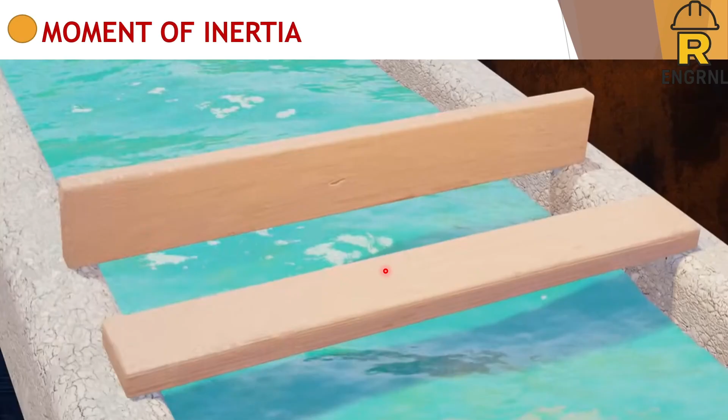Ano nga ba yung moment of inertia? Let's start with this illustration. Meron tayong dalawang same cross-section na planks, pero iniga natin siya ng magkaibang orientation. Yung isa nakatayo, yung isa nakahiga. Kung maglalagay ako ng load dito, like 100 kg, palagay nyo alin sa dalawa ang mag-bend ng malala? Palagay ko ang sagot nyo ay yung nakahiga. Tama yon.

Because yung cross-section ng dalawa ay parehas, though magkaiba sila ng orientation, depende sa rotational axis natin. Yung bending axis natin, or rotational axis, is placed here. May mas appreciated cross-sectional area dito sa part na nakatayo, kaya mas nakakapag-resist siya ng bending, unlike dito. Ibig sabihin, this moment of inertia is like an area rotating at a certain axis, dahil may moment. Ibig sabihin, may certain area o certain force with a moment arm perpendicular to it na magmo-moment at a certain point. Ang tawag natin dito ay second moment of area. This is the measure of a cross-section's resistance to bending due to its shape.

Pwedeng magkakaiba yung orientation ng bending axis nila. Pwede sa y-axis, pwede horizontal axis, or pwedeng wala din sa centroids nila. Basta alam lang natin kung ano yung kanyang moment arm. Ito yung resistance to bending.

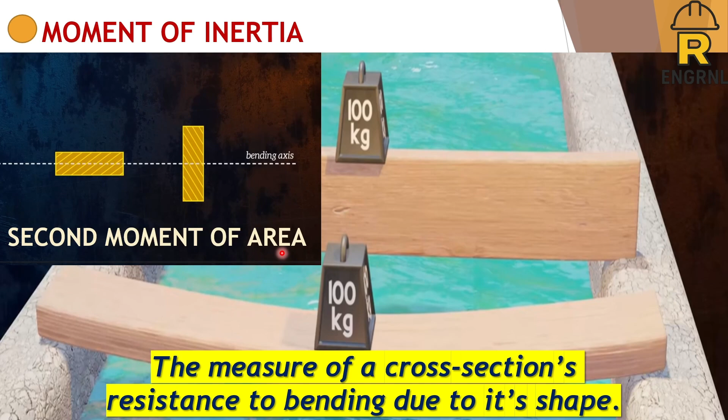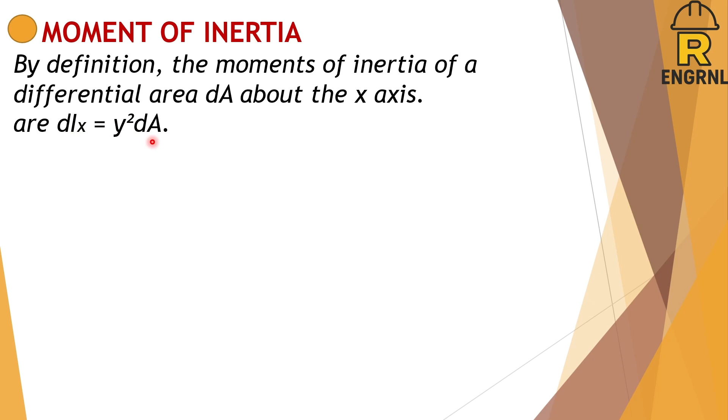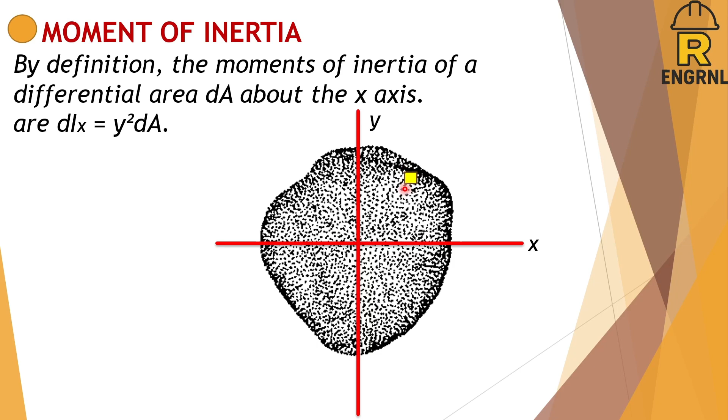By definition, the moment of inertia of a differential area or dA about the x-axis, the differential element of Ix is equal to y squared dA. Para mas magets natin, meron tayong arbitrary shape, at a centroidal axis, tututok ito sa centroid niya. At from that arbitrary shape, kukuha tayo ng isang element, ito yung infinitesimal element. Yung area, yung small area, tinatawag nating differential area, na kapag minultiply natin into distance y squared measured from the point of rotation, which is x-axis, ito yung second moment of area, which is also the sum - pag kinuha natin yung isang element at sinum-up para makuha yung buong shape - equal to I, ang inertia. Since sa x tayo nag-rotate, Ix yan.

Kung ito ay centroidal x-axis, ibig sabihin ito ay centroidal moment of inertia, ganon din sa y. Sa integral calculus, mas sanay tayong makita yan ng ganito: integral of y squared dA, limits from the whole area. Kung kukunin din natin sa y-axis mula sa element na ito, ito naman yung kanyang moment arm, so x squared naman yan times dA. Yan lang yung formula natin for moment of inertia of a certain shape. Yung units natin na ginagamit, pag SI, mm to the fourth o meters to the fourth, at sa English units ay inch to the fourth o feet to the fourth. Basta ang ating exponent ay at the fourth.

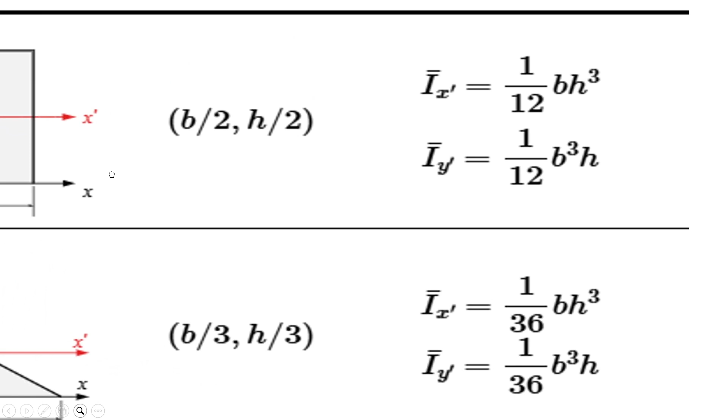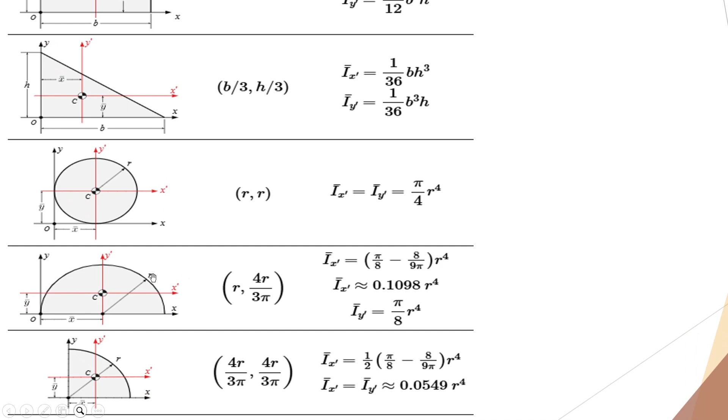Now, there are regular shapes na initially proven na yung kanyang centroidal moment of inertia, alam din natin yung kanyang centroid. So look at these figures - rectangular, meron tayong BH cube over 12, b cube of h over 12 sa Y, and so on and so forth. Ito yung mga familiar regular shapes na magiging reference natin sa mga susunod nating examples.

Para maintindihan nating mabuti yung process ng pagkuha ng moment of inertia at any axis, kailangan mo munang maintindihan na meron siyang sariling moment of inertia at its centroid. Kung mapapansin nyo yung red axis, yan yung centroidal axis, nakatutok sa center ng mga shapes. Yung Y and X axis naman ay yung global axis, ibig sabihin dyan siya ni-reference sa global. Kung kukuha tayo ng moment of inertia at global X axis and Y axis, may paraan pa tayo doon, pero for this time, tatandaan lang natin na meron siyang sariling moment of inertia at its centroid. Isa sa ulo natin to.

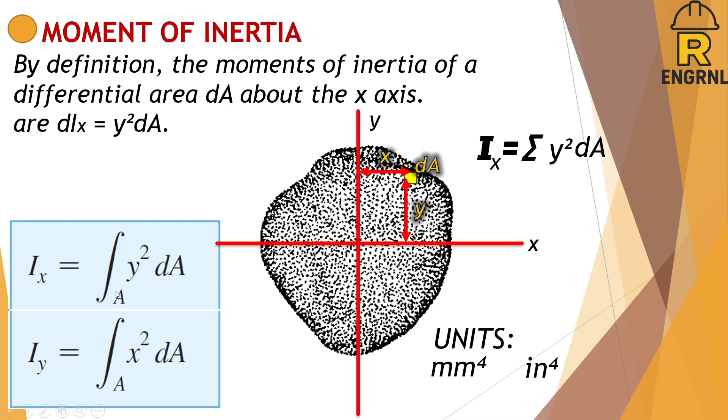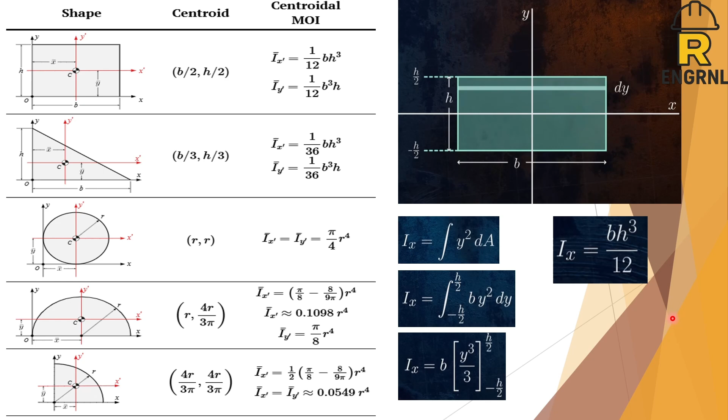Yun, ito yung centroidal moment of inertia about x-axis. So sa IY naman, papalitan mo lang yung infinitesimal element at y direction, instead of y gagawin mo lang x squared.

At by calculation, ganun din po, magiging b cube h lang over 12. So yan yung naging process nung ating centroidal moment of inertia. Ganun din yung gagawin mo sa triangle, circle, semicircle, and quarter circle.

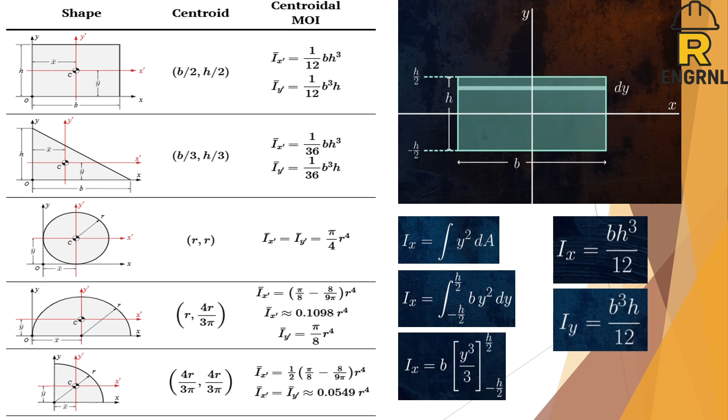Let's proceed with this: parallel axis theorem of an area. Sabi ko kanina, pwede rin naman na ang area ay mag-take ng moment of inertia at any axis.

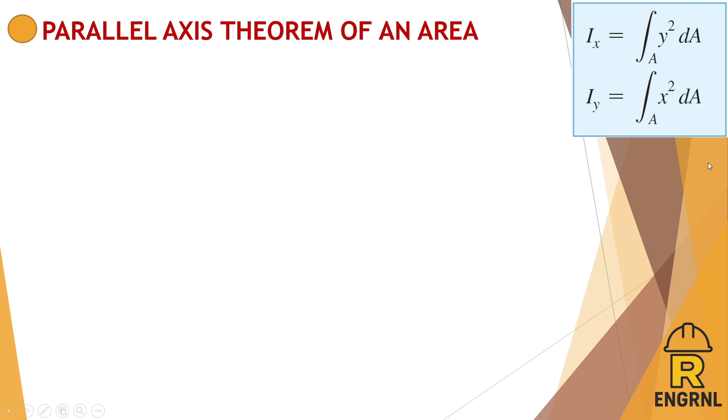Hindi lang sa centroidal axis. Kinuha lang natin kanina yung centroidal axis para centroidal moment of inertia sa x-axis, para pwede natin siyang i-transfer at any axis. So suppose you have an area here, at any place, no? Kung ito yung kanyang centroidal axis, ito yung centroid niya, papaikutin daw natin siya at any axis.

For example, ito na yung bagong x-axis mo, tapos dito yung bagong y-axis, ito yung y-axis mo. So sabi niya, the moment of inertia of an area about any axis that is parallel to an axis passing through the centroid and about which the moment of inertia is known. So dahil known na yung ating mga moment of inertia sa centroidal, paikutin lang natin siya at any axis.

Yung area na ito is ita-times natin sa moment arm. Suppose iikot ka sa x-axis, ang moment arm niya is d. Kukunin mo yung perpendicular distance niya doon sa point of rotation and then i-square mo, tapos i-add mo yon sa sarili niyang centroidal inertia.

Yun nga, Ix is equal to Ix prime bar, ang ibig sabihin nito is your centroidal MOI. Yan yung kaninang nasa table, so kung rectangle yan yung BH cube over 12. I-add mo lang daw yung area ng shape times D.

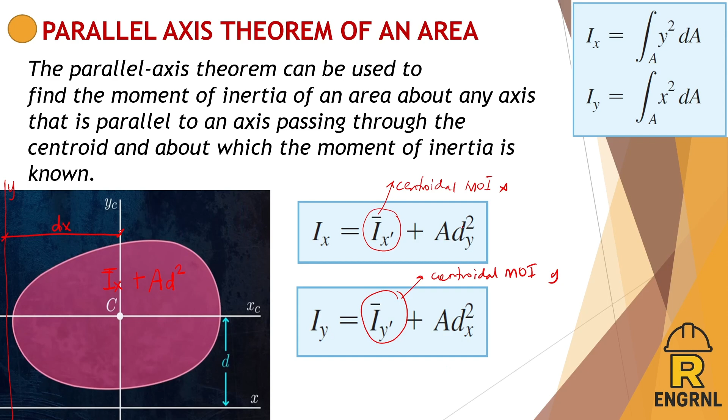Madali lang siyang intindihin, so para mas magets natin, sampulan natin itong shape na rectangle. Sa kanina nakita nyo, ang sentro niya is nasa B half, tapos H half, di ba, with the reference of this axis. Yung red axis is your centroidal axis, and your black axis is your any axis.

Yung centroidal MOI natin is given that BH cube over 12 kapag sa X, sa Y is B cube H over 12. Kung gagawin natin na kunin yung moment of inertia at x-axis black, tapos kunin natin yung moment of inertia at y-axis black, ganito yung gagawin: sa inertia ng x-axis, centroidal x-axis, and centroidal moment of inertia sa x-axis plus a dy squared. Isa-substitute ko lang po yung ito, bh cube over 12, that is regular shape eh, no?

Plus your area, BH, area ng rectangle, times your distance from centroid to the x-axis, o y bar, di ba? Yung d na to is supposed to be h over 2 squared. To simplify that, that is 1/3 BH cube. Yan na yung inertia niya at x-axis, at the new x-axis, which is placed at the base of the rectangle.

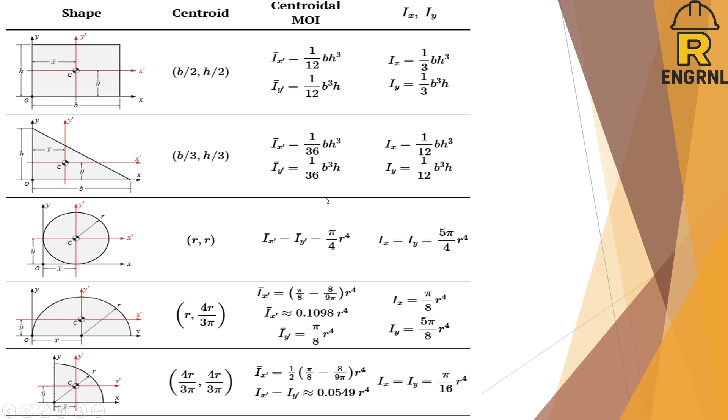For the circle, the centroidal moment of inertia is pi r to the 4th over 4. For the rectangle it's bh cube over 12 for x, and b cube h over 12 for y. But for the circle, both are the same, pi over 4 r to the 4th.

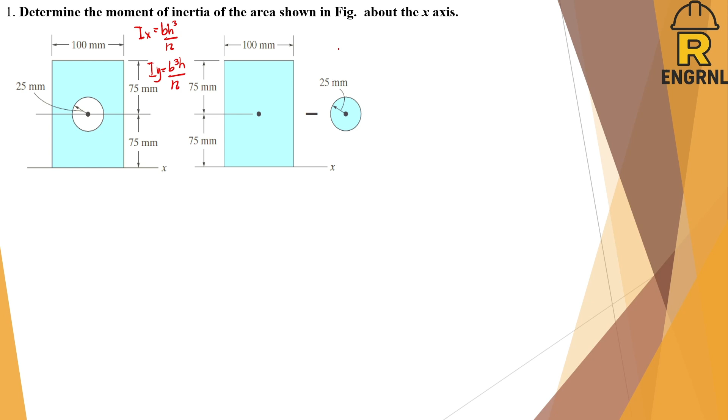Let's write it down here. For Ix, that is bh cube over 12. For Iy, it's b cube h over 12. For the circle, both are pi r to the 4th over 4. So that's what we'll use since we're working about the x-axis.

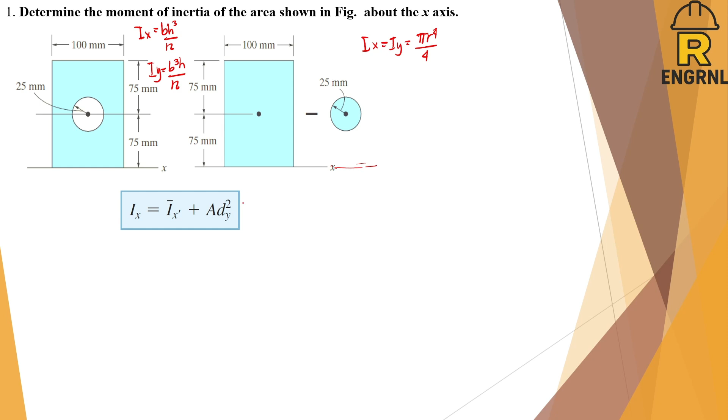So this is where we get our rotation or moment of inertia. Simple - let's start with the rectangle first, and this time I'll use a table. This would be our Ix bar, and your d, meaning distance from centroid to the point of reference or rotation axis, and your new Ix.

We have two segments, A1 and A2. I'll call this A1 and this A2, and this time we subtract A2. For A1, the area is very obvious - 100 times 150 equals 15,000.

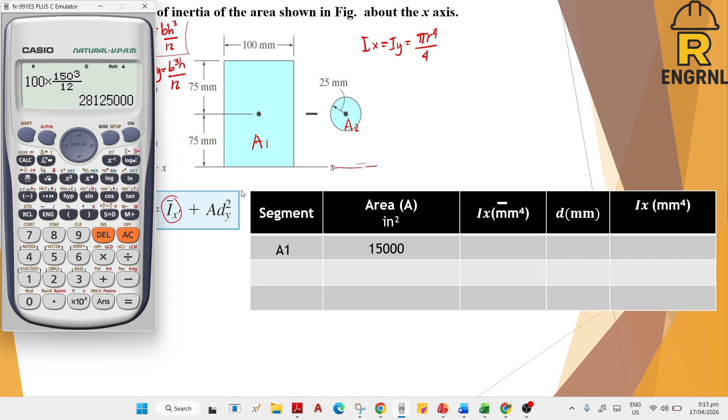Now for the centroidal moment of inertia, that is BH cube over 12. Let's compute it - the base is 100, the h is 150 cubed, over 12. We get 28 million, 125,000 in mm to the 4th.

Then if we measure the d from the centroid to the reference point of rotation, which is 75. So using this formula, substitute the 28 million here, the area 15,000, and your d is 75 squared. That gives 112.5 million. That's just for area 1.

Now let's subtract area 2, which is the circle. For area 2, we get the area of the circle, that is pi r squared, or pi times 25 squared, which equals 625 pi.

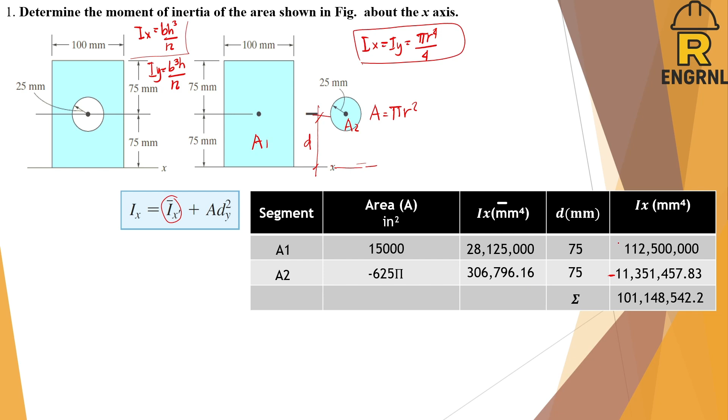So this time let's get the sum, meaning we subtract already - this should be minus, so we subtract this, since the Ix of the rectangle and the Ix of the circle are deductible. So finally, we have this moment of inertia at x, 101 million.

Or you can rewrite your answer like this, times 10 raised to 6 mm to the 4th. You'll notice that when using SI units with mm, the answer is long, but in English units with inches to the 4th, it's shorter. So let's start here to understand the basic concept and procedure.